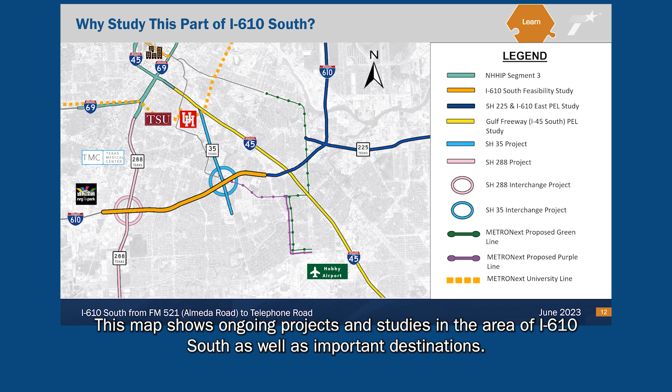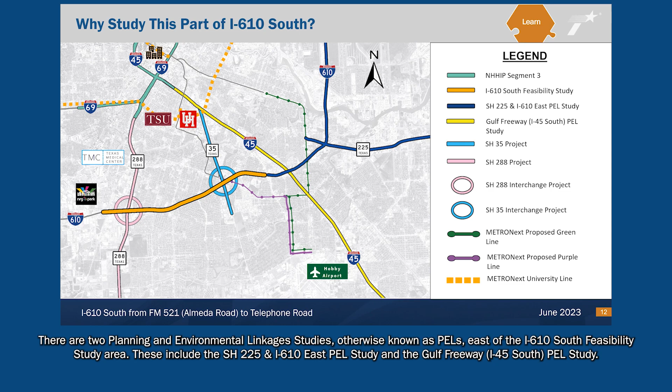This map shows ongoing projects and studies in the area of I-610 South, as well as important destinations. There are two Planning and Environmental Linkages Studies, known as PELs, east of the I-610 South feasibility study area. These include the State Highway 225 and I-610 East PEL study and the Gulf Freeway I-45 South PEL study.

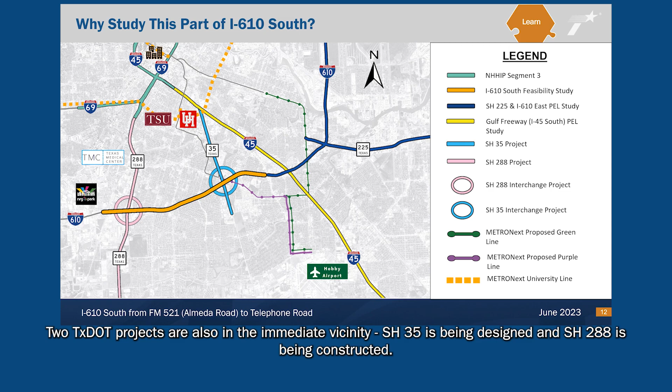Two TxDOT projects are also in the immediate vicinity. State Highway 35 is being designed and State Highway 288 is being constructed. In addition, Segment 3 of the North Houston Highway Improvement Project, or NHHIP, is being designed.

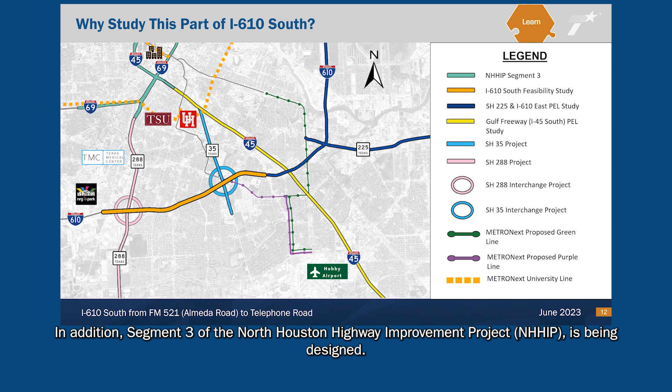Studying I-610 South is necessary to identify alternatives for providing connectivity and continuity in this network of the Houston freeway system. Now that we have covered the reasons why it is important to study this portion of I-610 South, let's discuss the study and project development process and the importance of your role in the process.

We are currently in Phase 1, which is developing needs and goals. Phase 2 will be developing and evaluating alternatives, and Phase 3 will be schematic and environmental. Throughout this process, you will play an important role by providing feedback to help guide decision-making to ultimately lead to a successful project or projects.

Now let's discuss Phase 1, developing needs and goals. In this phase, we are evaluating existing conditions on I-610 South between FM 521, also known as Almeda Road, and Telephone Road, identifying the transportation needs and developing goals for the study.

At the end of this presentation, you will be asked to participate in a survey to provide us with what you feel the transportation needs are for this area, your input on the study goals, and what transportation-related improvements you want to see implemented. The information received from stakeholders and the public during this phase, along with the analysis of existing conditions, will guide Phase 2 of the study.

During Phase 2, expected to begin in the summer of 2023 and continue through summer 2025, all preliminary alternatives will be evaluated to determine how well they meet the transportation-related needs and goals identified in Phase 1. This evaluation will include a look at the preliminary need for right-of-way and a high-level analysis of the environmental impacts that could occur.

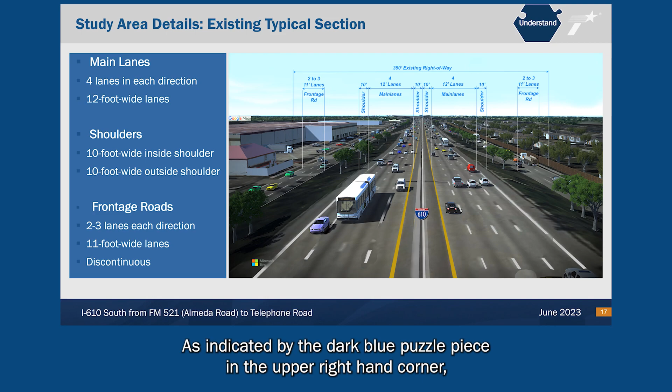As indicated by the dark blue puzzle piece in the upper right-hand corner, we are now transitioning from the Learn portion of the presentation to the Understand section.

In this slide and upcoming ones, the existing conditions of the I-610 South main lanes and frontage roads from FM 521, also known as Almeda Road, to Telephone Road will be presented. This slide has an illustration of the existing typical section of the roadway. The typical section is a cross-section of the road showing how it looks today.

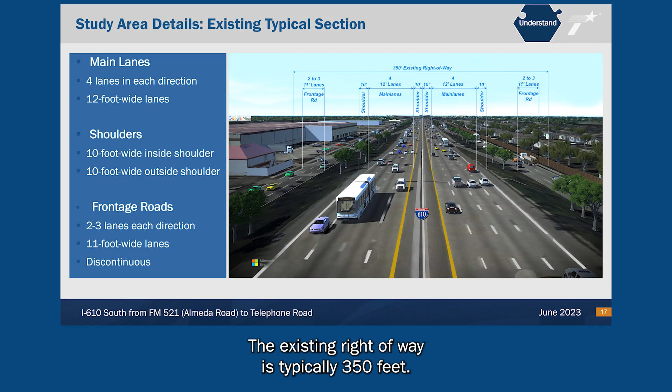Within the study limits, the current roadway has 4 12-foot wide main lanes in each direction with 10-foot wide shoulders. The frontage roads have 2 to 3 11-foot wide lanes and are discontinuous in some areas. The existing right-of-way is typically 350 feet.

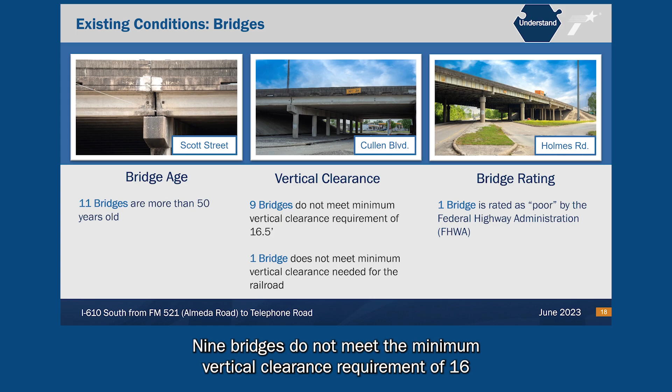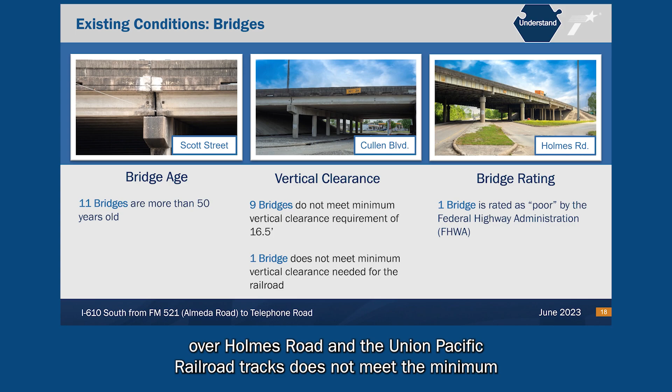This segment of I-610 South between FM 521 and Telephone Road contains 13 bridges or overpasses. 11 bridges are more than 50 years old. 9 bridges do not meet the minimum vertical clearance requirement of 16 feet 6 inches for roadways crossing under I-610. The bridge over Holmes Road and the Union Pacific Railroad tracks does not meet the minimum vertical clearance of 23 feet 4 inches for bridges crossing over the railroad.

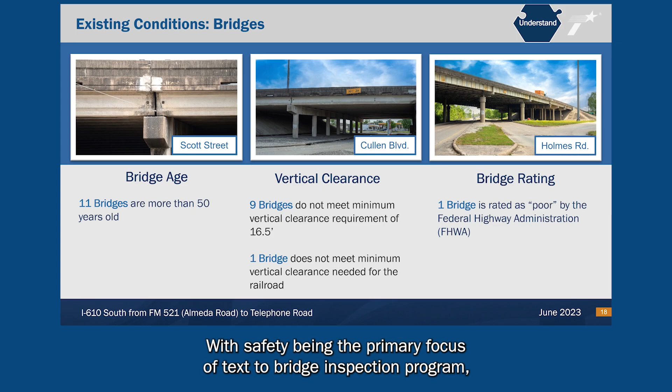It is also rated as poor due to a sufficiency rating of less than 50. Sufficiency ratings, ranging from 0 to 100, consider the bridge's structural adequacy and safety serviceability and functional features like width, load carrying capacity, and vertical or horizontal clearances. Bridges exhibiting signs of some structural deterioration are not necessarily unsafe, with safety being the primary focus of TxDOT's bridge inspection program. Any bridge that is open to vehicular traffic is safe.

Frontage roads, ramps, and U-turns are components of the highway system that provide connectivity and access to the main lanes, surrounding communities, and businesses. In general, the connectivity and access is poor along the frontage roads in the study area. The existing I-610 South frontage roads are discontinuous in 6 locations. Some entrance and exit ramps have very steep entrances and exits and are not long enough for safely merging traffic.

There are 9 cross streets in the study area that do not have U-turns, which means drivers that want to make a U-turn must go through the intersection.

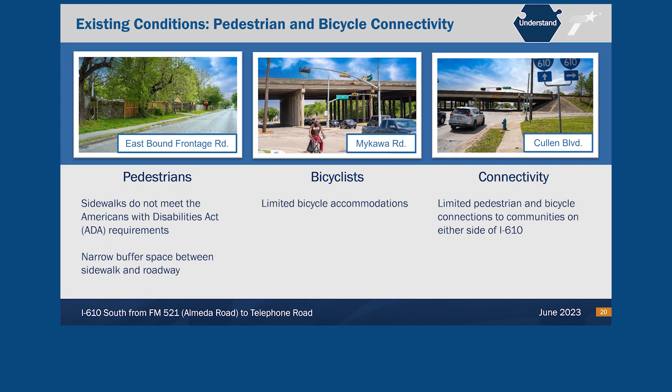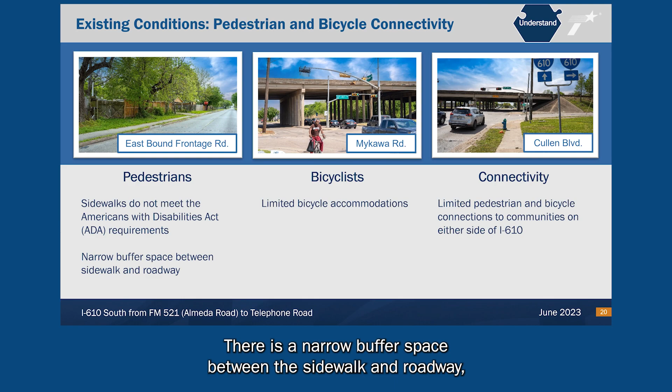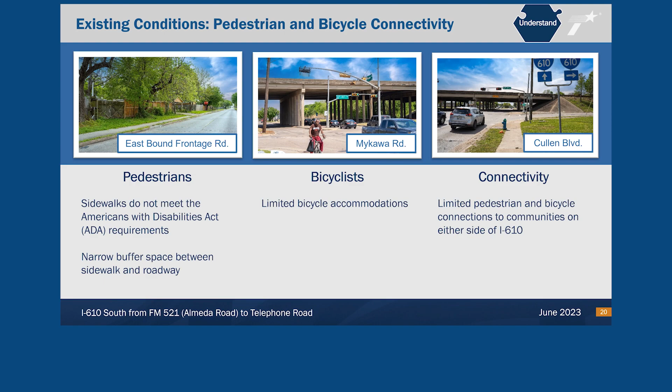The study team evaluated the pedestrian and bicycle accommodations in the study area. There are existing sidewalks along the frontage roads that are in poor condition and do not meet the Americans with Disabilities Act requirements. There is a narrow buffer space between the sidewalk and roadway, which can be uncomfortable for pedestrians and bicyclists due to the closeness of passing vehicles. The study area has limited pedestrian and bicycle accommodations that connect the communities from one side of the highway to the other.

Understanding historic crash data is also critical to understanding the existing conditions within the study area. Crash information was obtained from TxDOT's Crash Records Information System Database, or CRIS, from 2018 through 2022 to analyze crashes along I-610 from FM 521, also known as Almeda Road, to Telephone Road.

The area between FM 521 and Cullen Boulevard has a crash rate of 310 crashes per 100 million vehicle miles traveled, which is almost 2 times the statewide average of 159 crashes per 100 million vehicle miles traveled.